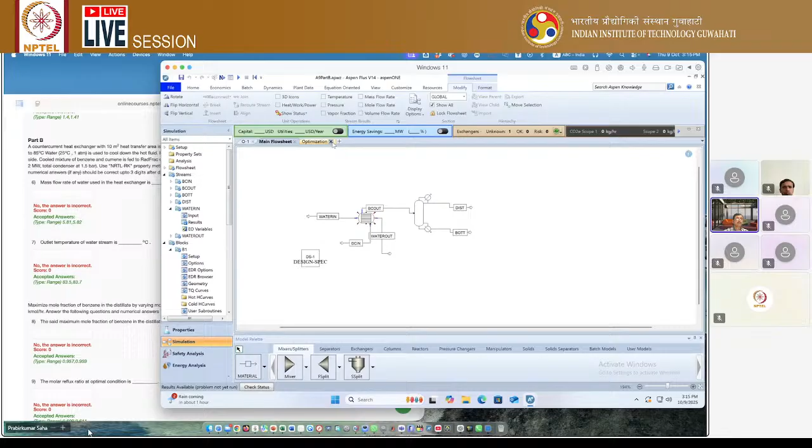what is said? After that, cooled mixture of benzene and cumene is fed to a RadFrac distillation column. So this is the RadFrac distillation column. So BC in, this is BC out, it is going into the RadFrac column. Okay. And the RadFrac column, it is equilibrium type. So we have given, sorry. Yeah. So this is the RadFrac column. Equilibrium type, 8 stages. Feed above third stage. So we will have this information over here at the stream.

Feed above third stage. Reboiler duty has been given 2 megawatt. So configuration, reboiler duty is 2 megawatt, 2000 kilowatt. And then condenser, total condenser is at 1.5 bar. So go to condenser pressure. Pressure is 1.5 bar. Okay. So what else? Reflux ratio is not given, but probably we are having certain information over here, which will ask us to vary the reflux ratio and all.

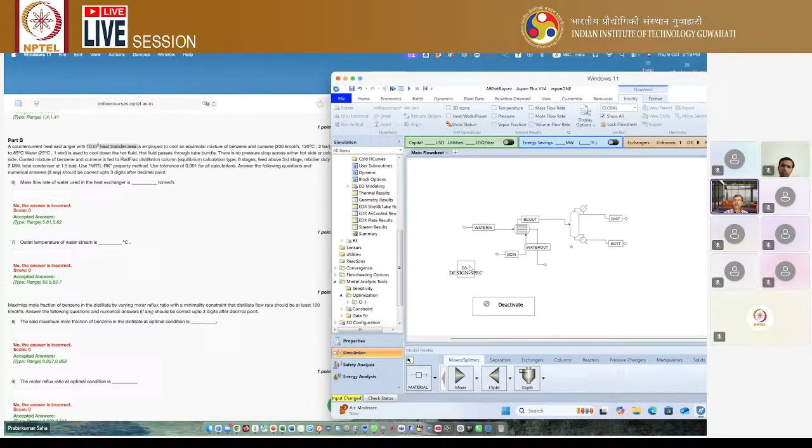what is asked? It is asked mass flow rate of water used in the heat exchanger. Okay. Now, what should be the criteria of mass flow rate of water used in the heat exchanger? Here, the 10 meter square of heat transfer area is important. So you will use a design spec over here. So in the design spec, you will write heat exchanger area. Okay, what is heat exchanger area?

It is the block variable calculated heat transfer area in square meter. So this is 10 meters square. What shall we vary? We shall vary the mass flow rate of water used in the heat exchanger.

So mass flow rate of water. So we will vary mass flow rate of water in, because this information was not there with us. We had given a dummy variable of 4 tons per hour. So that one, we have to manipulate the variable between 2 to 6. Okay. So we had given a dummy variable of 4, but we will vary it from 2 to 6.

Okay. And what is the specification? Specification is the exchanger area. Exchanger area target is 10, because we have got this information, 10 meters square of heat transfer area, right? And tolerance value is 0.001 because we have used tolerance of 0.001 for all calculations, right? So with that information, let us run this process, okay? So we first initialize and then run.

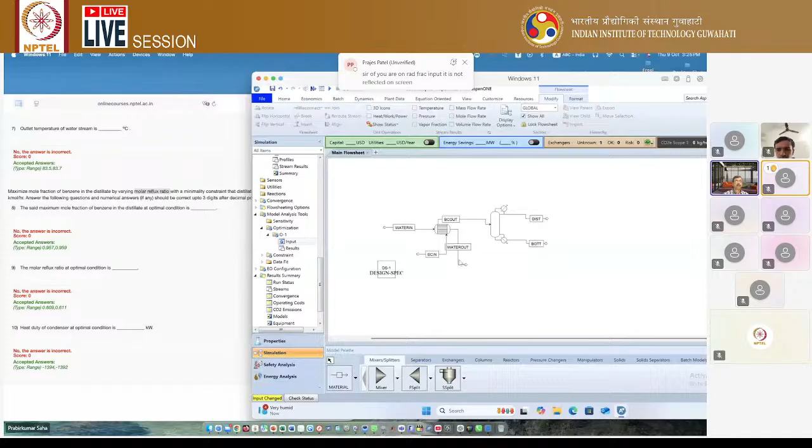So for that, we have to close the design spec and open the optimization. So here the optimization routine needs to be opened. So we have to define the mole fraction of benzene in the distillate. So this is ben mol FR, right? That needs to be maximized. So you are talking about the maximization problem, right? So you are now maximizing ben mol FR, which you have defined over here.

And by varying molar reflux ratio. So this is the vary button. What do you vary? You are varying molar reflux ratio in the B3. B3 is the column, fractionation column. So you are varying between 0.1 and 10. We have taken 0.9 as a dummy variable, but here you will get the exact variable. But here is a catch. There is a minimality constraint of the distillate flow rate. So the distillate flow rate should not be less than 100 kilomole per hour.

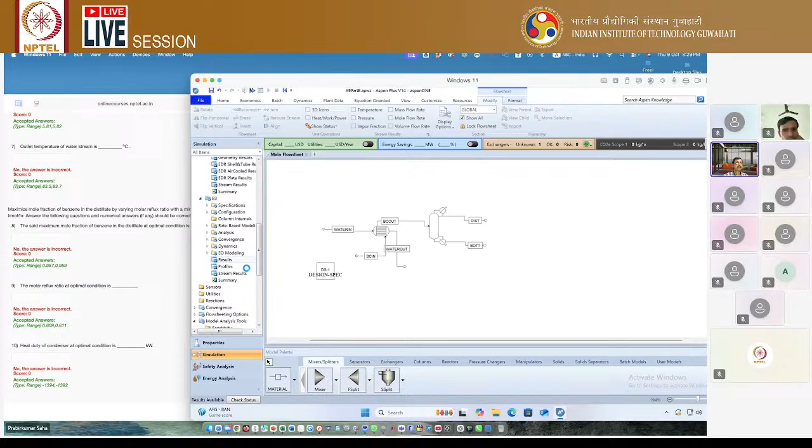And heat duty of the condenser at the optimal condition. So you have to find the heat duty of the condenser, right? So you have to go to the results over here and find the condenser. Where is the condenser? Condenser will be here, right? This is the condenser heat duty. So condenser heat duty in kilowatts.

So you simply change the unit into kilowatt and you find minus 1393.58. So minus 1394 we have given. Okay. So this is how we solve assignment 9. Got it, Prajesh? Yes, sir. Okay.

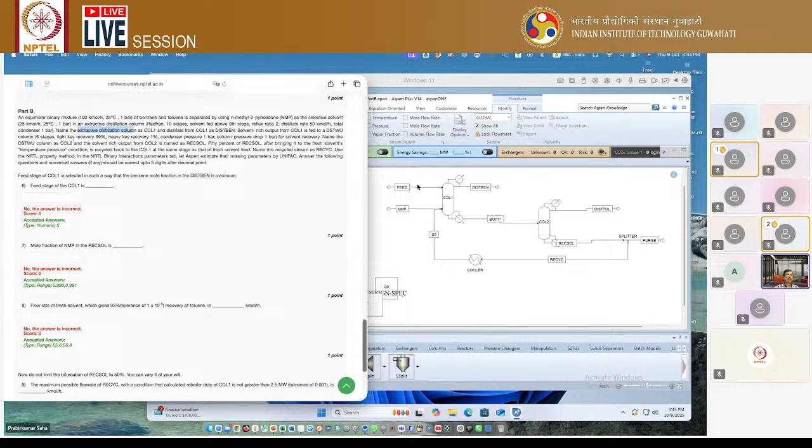So go to simulation. In the simulation there are two things, col1 and col2. This is col1. Here is the feed; in the feed we have the binary mixture, and this is NMP. Col1 is the extractive distillation column. The feed is 100 kilomole per hour, 25 degrees centigrade, 1 bar, equimolar. And NMP is 25 kilomole per hour, 25 degrees centigrade, 1 bar. So this is our NMP.

Col1. Let us see this col1. This is a RadFrac column, 10 stages, solvent fed above the 9th stage; NMP is the solvent. And then the reflux ratio is 2. Distillate rate 50 kilomole per hour. Total condenser at 1 bar, right?

This is col1. Distillate from col1 is dist-ben. Solvent-rich output from col1 is fed to DSTWU. So this is the solvent-rich output. It is fed to DSTWU. So this is col2. Let us open col2.

Yeah, this is a DSTWU column, 5 stages. Light key recovery at 0.99, toluene is the light key, heavy key 1%, isn't it? Condenser pressure and column pressure are 1 bar: column pressure 1 bar, and condenser pressure 1 bar. So column pressure drop is 1 bar.

So if the condenser pressure is 1 bar and column pressure drop is 1 bar, then reboiler pressure has to be 2 bar, right? Only if it is 2 bar and 1 bar will the column pressure drop be 1 bar. So that's how the condenser and reboiler have been fixed. Okay, so solvent recovery is done.

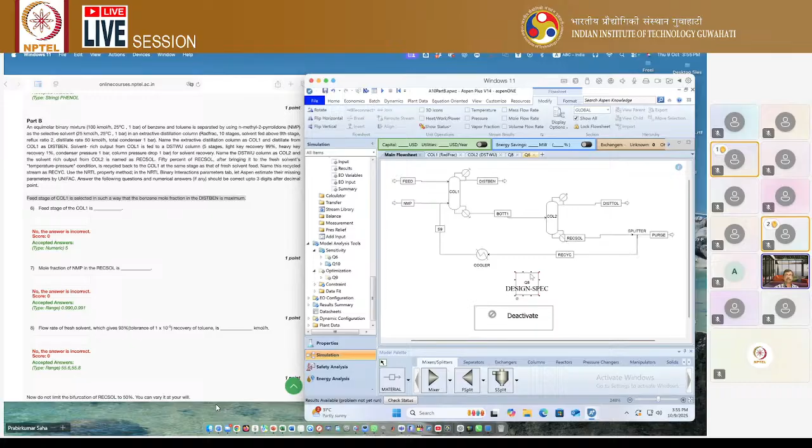Okay, so where the feed stage is put. So this we have to vary, and we will define MF bench. What is MF bench? The mole fraction of benzene in DISTBEN. And we will tabulate it in MF bench. Okay, so we'll tabulate it.

So what we will do, we have deactivated this. We will deactivate this one also because this is not needed. We'll deactivate, but Q6 we will activate. Okay, and let us reset and run. So let us run it.

Yeah. Now results are available. Now see the result. Feed stage of column is selected in such a way that the benzene mole fraction is maximum. So let us see where it is maximum. It is 0.85, 0.9, 0.92, 0.93, 0.93, 0.92. So between 5 and 6, this one is maximum, right? It is 0.9359. So stage number 5 is maximum. Okay, so this is the answer.

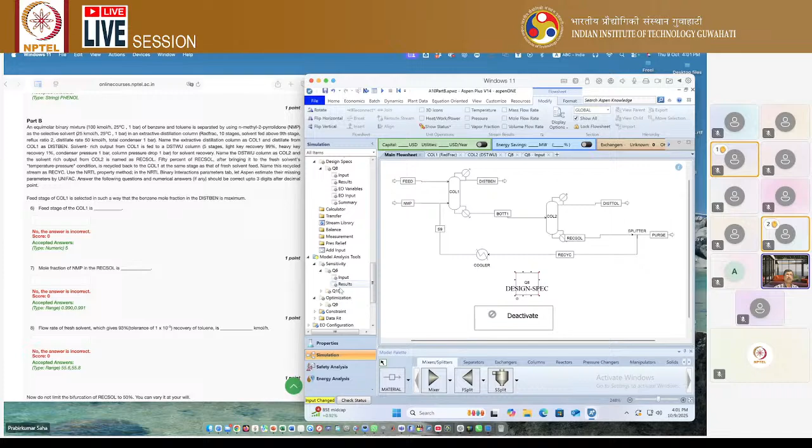So in Fortran, we have written mole tol by mole feed is recovery, and that recovery should be 93% with a tolerance of this. And we can vary the fresh solvent flow rate, right? So Q8 we activate, reset, and we run. Okay, so go to the results and check. The manipulated variable is 55.7048. So the answer is 55.7.

So 6, 7, 8 I have done. In the similar manner, 9 and 10 we have to do. Okay. So this is how we have to solve assignment 10. I think it is already 2 minutes past 4. So we have to end this session.